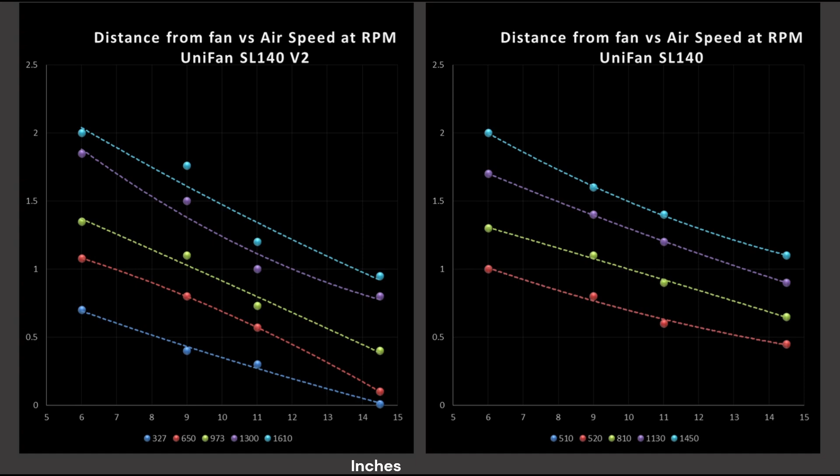The 14.5-inch mark is representative of your large towers. Think longer cases and bigger cases. Something like the Fractal Design Torrent fits into that size category. So I have a control fan. It is 3 parts A12X25 to 1 part A14. This control fan is meant to be an idealized fan to indicate above it is good to excellent performance, below it is good to poor performance, depending on how far off the beaten path it is.

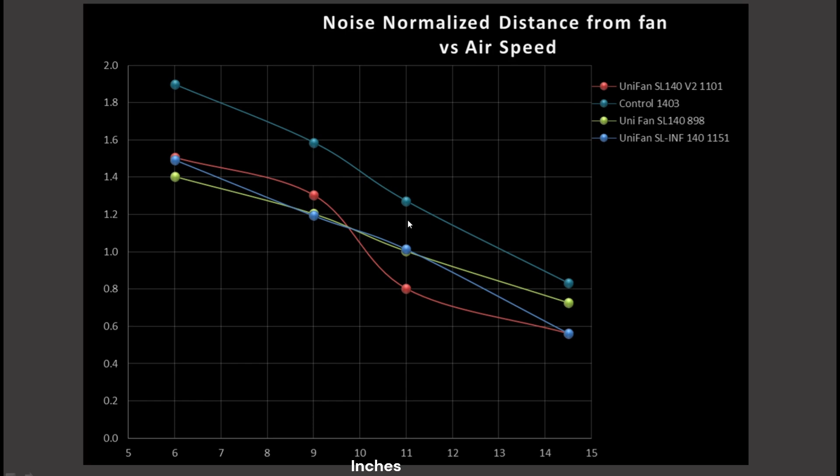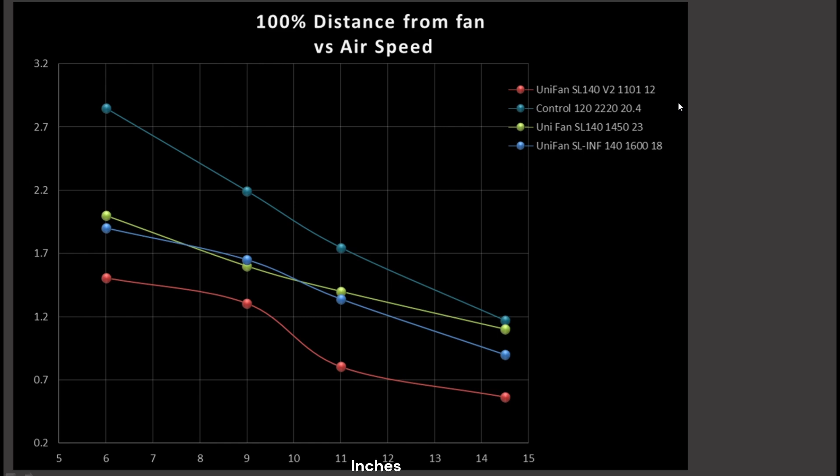So we have a bunch of Unifan SL series in here, but the key one we're going to be taking a look at today is the SL140 V2, this red line. It's right in line with the other fans, drops off, and then kind of levels out again. I'd put it in an okay performance category. It's honestly too far away from the control fan for me to say that this is a good case airflow fan. At 100% PWM fan signaling, it drops further back. What the heck? The original SL140 outperforms this fan. It's just its RPM doesn't get high enough to really be a good case fan.

So in the case simulation test, how does the V2 compare to the other fans around it? Well, right here in the teal line, it's kind of in the middle at noise normalized values at the 6 and the 9-inch mark. But once we're looking at bigger cases, it is underperforming compared to other fans. So if you're in a smaller case, it might be just fine. But in a bigger case, I probably wouldn't really recommend it. It is towards the bottom.

You may have noticed that the graph just jumped and there's a second set underneath it. I'm finding just a couple of mistakes while I was recording this video, so I'm hoping to implement fixes while I'm doing it. Depending on when the Infinity one comes up, there are going to be a couple mistakes in there. I didn't get the V2's max PWM fan signal quite right in a couple of the graphs, so use this one for that one. I do apologize for those errors.

Anyways, it's still towards the bottom of the graph, so it's overall not a great result. Noise level for case simulation test, 9-inch mark. The 9-inch mark was chosen because I needed airspeeds over 0.5 meters per second, and the 9-inch mark gave me the most reliable data with regard to that.

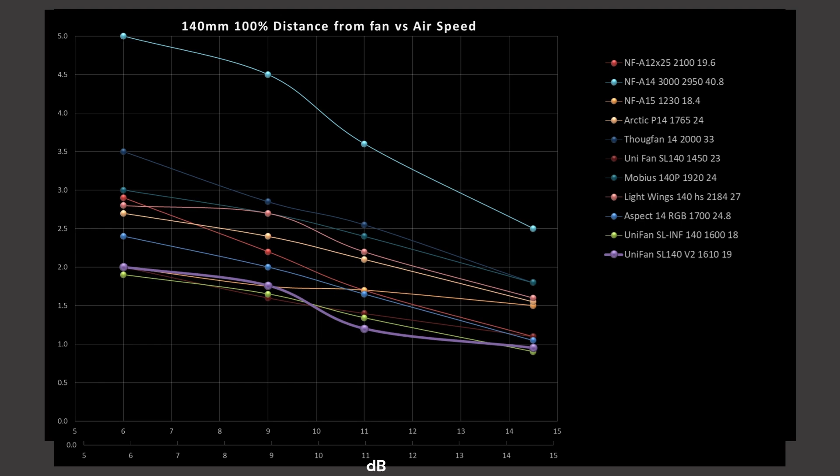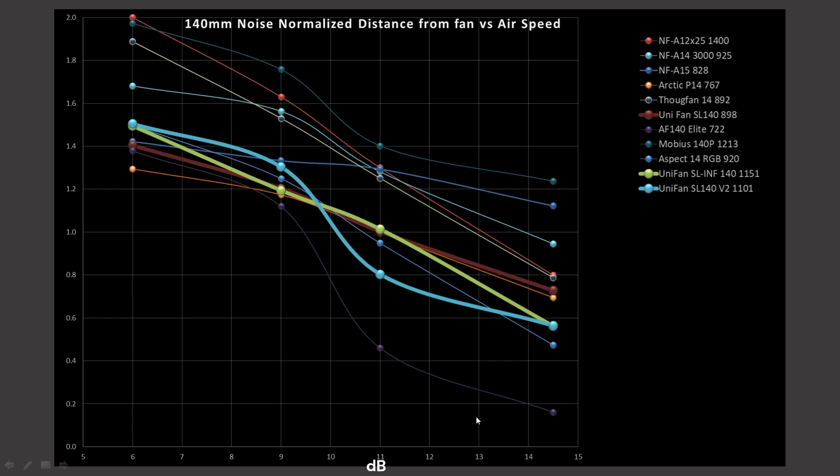And it still showed separation between the fans that had a good concentrated airflow and ones that tended to spew off to the sides. It doesn't show it as much as we would see at the 11-inch mark, but again, I needed the airspeed over 0.5 meters per second. So we do see that the V2 is sitting towards the bottom of the graphs in this case airflow test.

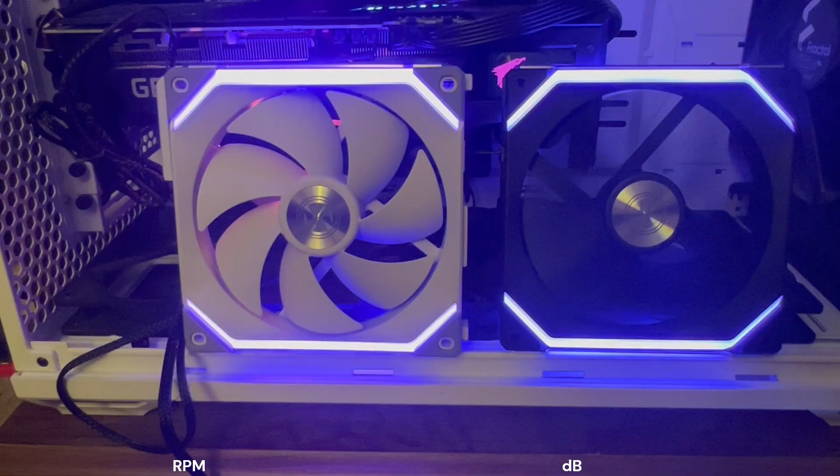And now for comparison's sake. You're going to have to ignore the fact that the original version does not have the fan spinning. I ran out of, well, fan headers. But luckily the RGB isn't built into the fan blade, so we get a good visual comparison between these two fans. So, well, here they are.

I would say they look pretty much identical. Obviously one is black, one is white, but the scheme for how the lighting looks is basically near on identical. And as we saw from the fan blade overview between the two, that's where you get some minor differences, as well as maybe some slight motor differences. But the RGB appearance is near identical.

Now we're looking at airspeed through my CPU air cooler. My cooler is the Noctua U12A. Yes, I'm aware that these fans are 140 millimeter class fans, and they will not normally work with a 120 millimeter class heatsink, but I just hold it firmly against it and measure the airspeed traveling through it, which would be the case no matter what kind of heatsink or radiator you're using. So it still gives the performance of how well it is at blowing air through it.

So now that that is said, better fans are top left, worse fans are bottom right, and my control fan is still the 3 parts A12X25 to 1 part A14 here in this red line. So we do see that the SL140 V2 is overall doing pretty well in terms of its blade design. It is outperforming my control fan, which is definitely an excellent thing for it to do.

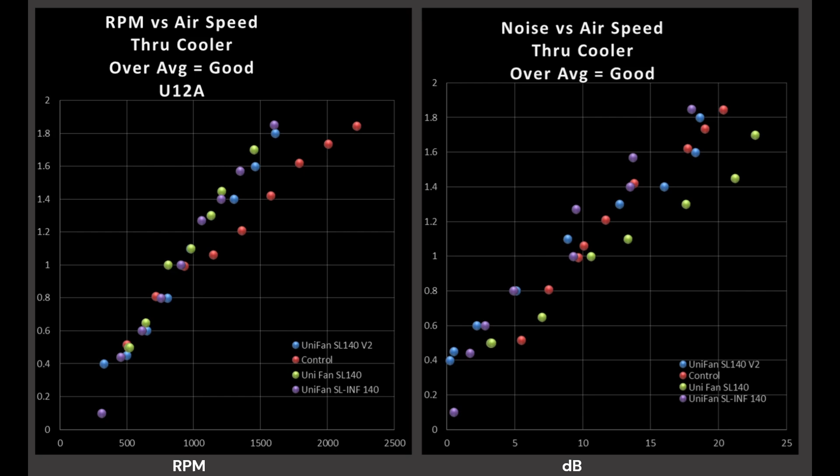On the right side here, we have noise versus airspeed. So this is now a noise efficiency graph. It is how much noise does this fan generate for a given airspeed. The V2, listed in this blue line, is slightly outperforming my control fan, which indicates that it's overall pretty good, but it bounces around the control fan at higher RPMs. So I'd still call it a good fan.

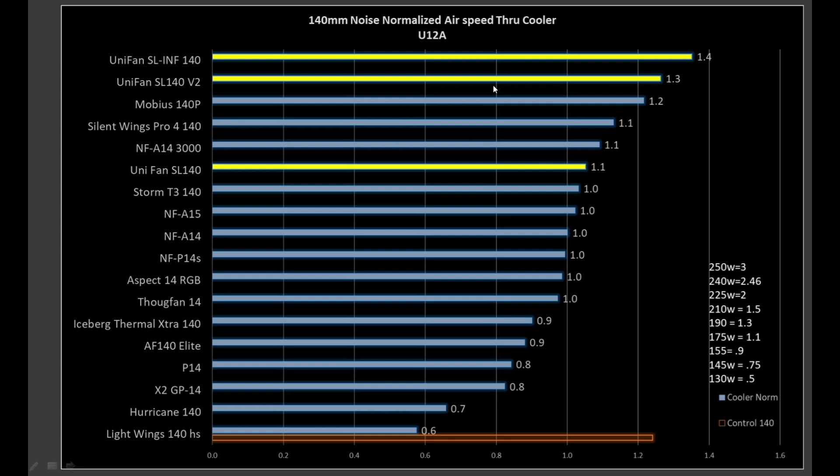At 100% PWM fan signaling, RPM does matter, and we see that the V2 is at the bottom. It just doesn't have the RPM to achieve those higher performance levels. So it could be that if you're in a full radiator system, let's say two 360 rads, you don't need that top end airspeed.

You would be perfectly sufficient with this particular fan, but I can't make that determination for you. It is up for you to decide if that's acceptable or not. So I guess let's just move on.

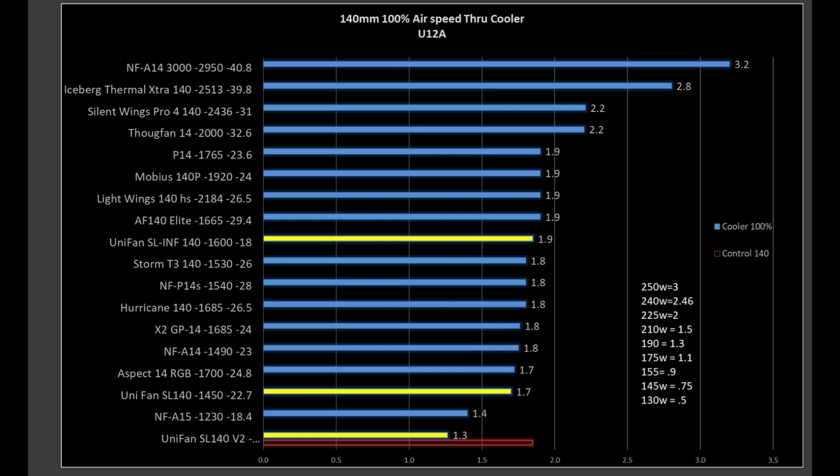All right, my editing skills are so-so. I had to go back and do a correction. I had my data lined up incorrectly. The SLV2 is sitting right here, while previously it was ranked right towards the bottom. This is at 100% PWM fan signaling, so it's actually still towards the bottom, but for its given RPM, it's actually in line, kind of where it should be. I just wanted to do that quick correction so the data makes more sense.

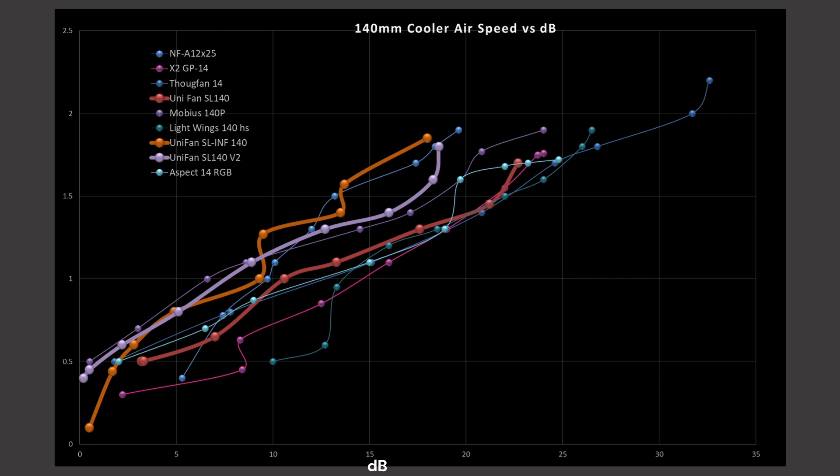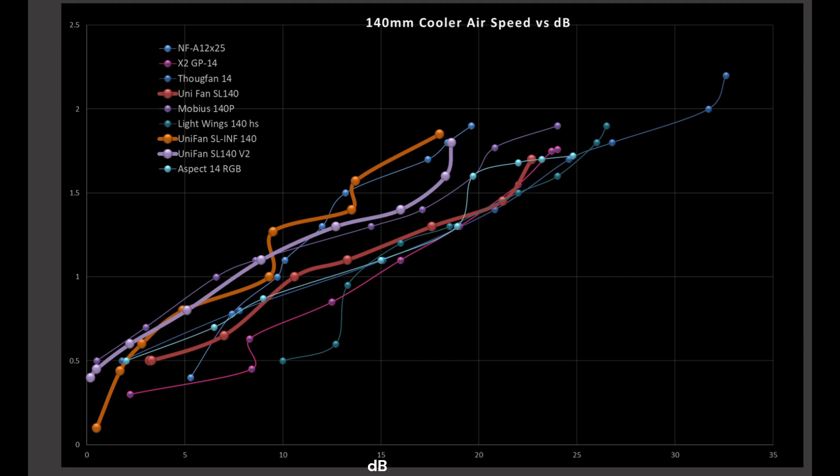For noise versus airspeed, I caught that while I was actually recording, so quick fix. Now we have cooler airspeed versus decibel rating. This is where you could determine what sort of performance characteristics you actually care about. This purple line that's bolded is the V2, and it is towards the top of the graphs, but not quite at the tippy top. Based on this curve, if it had just a little bit higher RPM, it could be a top performer, but it just doesn't quite get there.

Now we're on to CFM testing. CFM testing is probably my least favorite test in the way most other reviewers tend to talk about it. Most other reviewers tend to talk about CFM testing as, hey, this fan has a high CFM number, thus it is great for case airflow. That is not how it works.

Now that all of that is said, RPM versus CFM, so blade efficiency, we do see that the blade design is very efficient versus my control fan. The control fan here is based off of the A14. It is no longer A12x25 combined with the A14 because this testing apparatus for 120s and 140 millimeter class fans are different, so this is purely based off of a 140 millimeter class fan. The V2 is lined up almost perfectly, a little bit under my control fan, so it's indicating it's not quite as efficient a blade design in this type of test.

In terms of noise analysis, it is ranked fairly well, beating out my control fan.

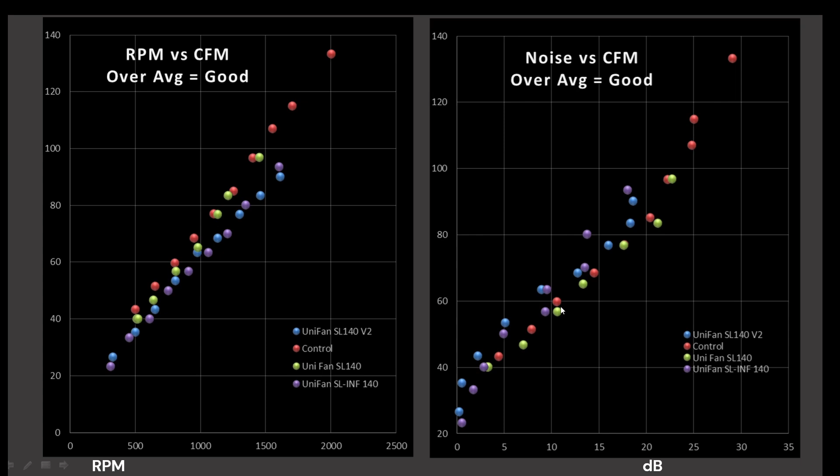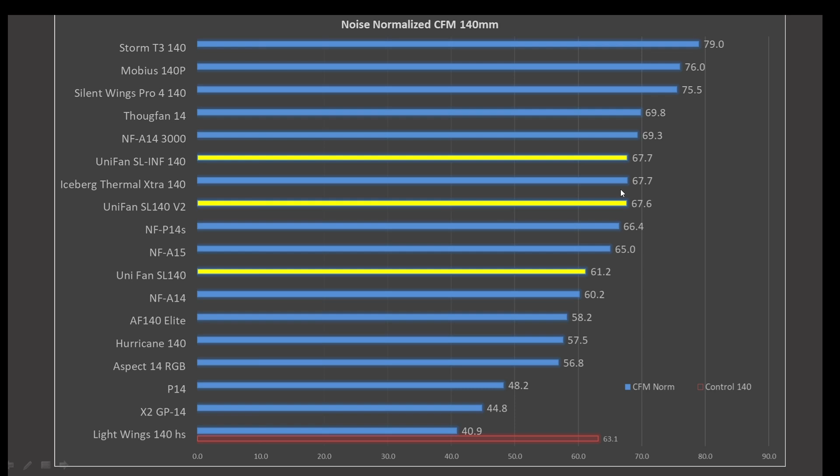How do they compare in noise normalized values? Well, the V2 is sitting right here, smack dab in the middle of the graphs, just a hair behind the Infinity, so it's overall doing pretty well.

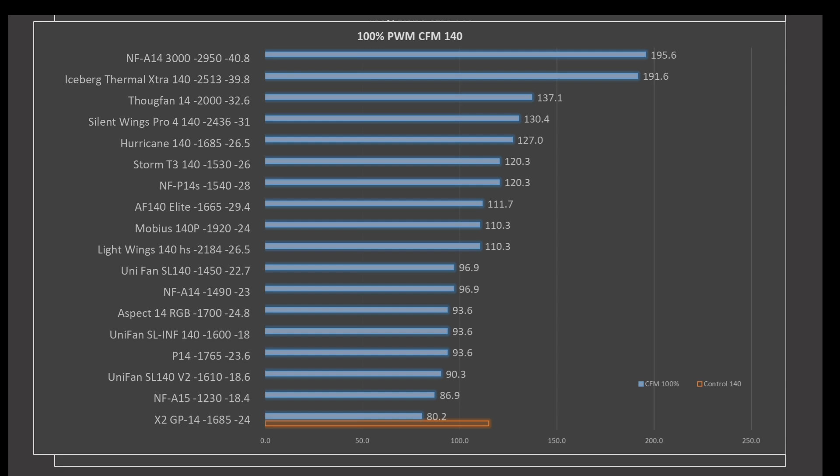Once again, while making this video, I found several errors, so I need to do a quick update. Right here is the V2, it is no longer highlighted. Sorry, you have to look at my mouse cursor, I'm circling it right now. It is sitting towards the bottom of the graphs, indicating that it doesn't perform particularly well in this test. We have the Infinity at a similar RPM, just a little hair above it in performance, so this goes into consistency's sake for this performance. What's interesting is that the slower spinning SL140 original is outperforming both of these two fans at 100% PWM fan signal. That is kind of an odd result, but it was repeatable and testable.

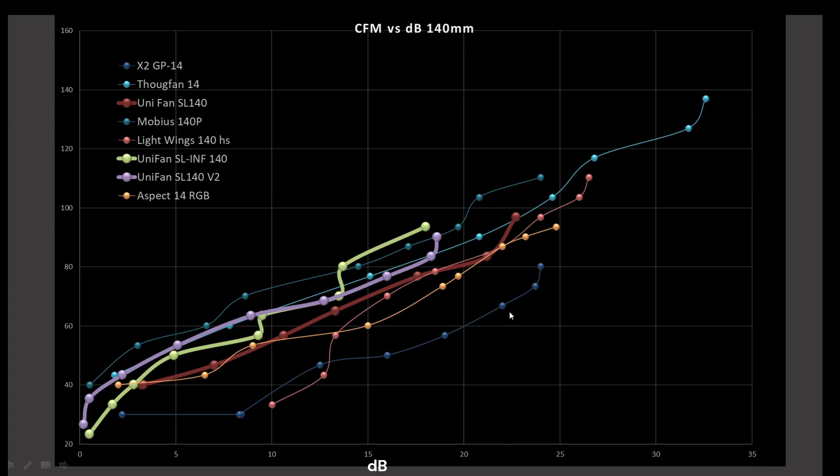Now we're on to value proposition. Value proposition for the SLV2 is a $35 fan. Value proposition is a simple calculation, performance per dollar, so if you're on an ultra tight budget, you want the maximum performance per dollar. As a note, in all of these tests, everything but the CFM test can be directly compared to each other. In the CFM test, 120s and 140s cannot be directly compared against one another because they use a different testing apparatus. So primarily in the case simulation test for the 6 and the 11-inch mark, we're going to be taking a look at the noise normalized results.

We do see that the V2 is a little bit better value than the other SL fans. These are all based off of standard retail pricing, as I could find it off of Amazon. So do note that.

So depending on what you care about—the RGB, the extras—the top value, it may not be a great pick. Overall, it's not a great value, but certainly the RGB on it is pretty. At the 11-inch mark, it's kind of fallen behind further, in all honesty.

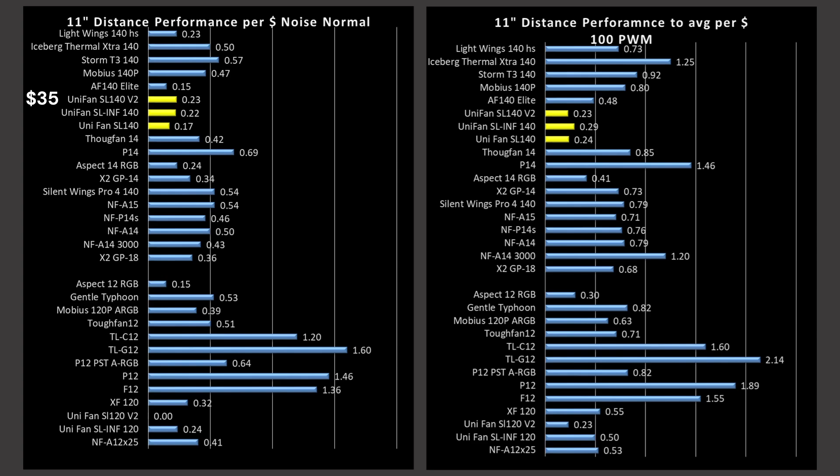So it's not a great case airflow fan, like we saw in the graphs earlier. How about through the CPU air cooler? Well, noise-normalized results, it's kind of just barely above average, but that doesn't mean it's a great value—it's a far cry from the top value picks. So again, that extra category is the RGB, whether you care about its appearance.

At 100%, it's doing okay. And in CFM testing, it's below average. Okay, so we're going to do the conclusion now.

So these fans, the Unifans, are basically appearance first, performance second. If you're looking for a good value pick, they aren't it. If you're looking for a value pick to get some RGB bling in your case, they aren't it either. They're really for people who have extra money to spend and care more about appearance than value. They're not terrible performing fans, except in case airflow, so they're good on heat sinks and radiators. Really, they're for people who want their visual appearance first, and are happy with the performance they generate.

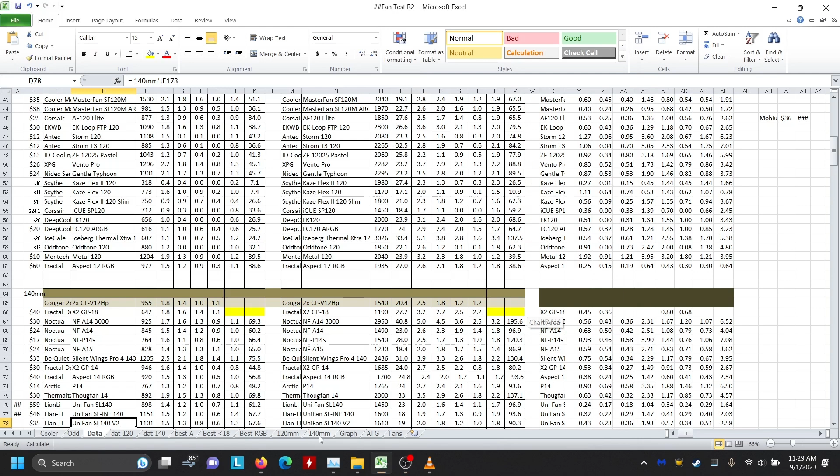All right, so at the end of every video I like to show off my raw data. This data belongs to me—I'm the one who generated it. It takes me about 1.5 to 2 hours to generate this level of detail in the data, and more time to generate and update the graphs and make the PowerPoint presentation for filming, plus time to record the video itself.

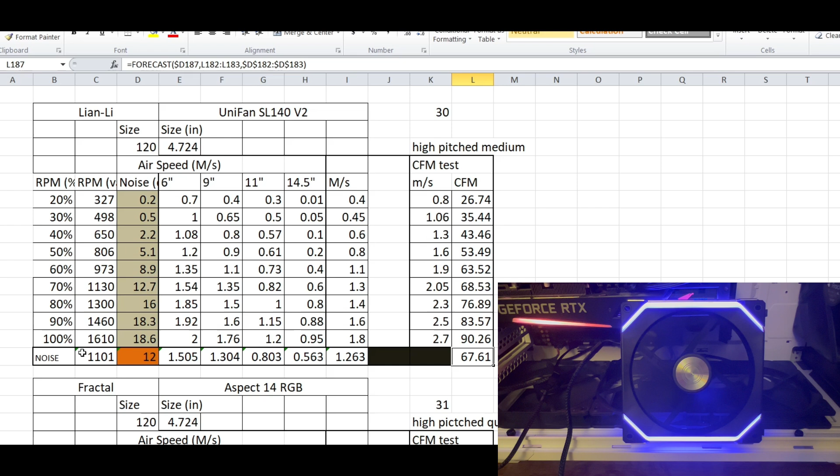If you're wondering why you should trust me, I'm an aerospace engineer. I have a master's degree in aerospace engineering with a concentration in computational fluid dynamics—in other words, fluid mechanics. So propulsion, fan design, wing design, that sort of thing—airflow through a tube. That is my background and specialty, and a fundamental interest of mine, which is why I'm making these videos.

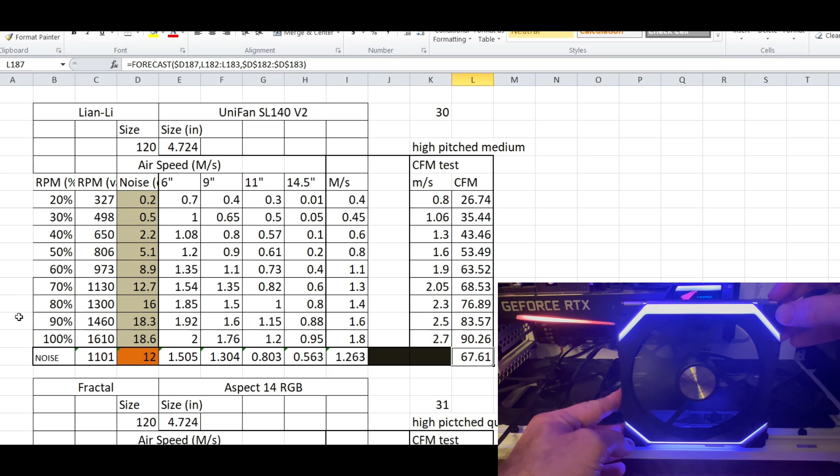I like comparing data, and I was unhappy with the way other reviewers were doing fan testing, so I decided to throw my hat into the gauntlet and see what came out.